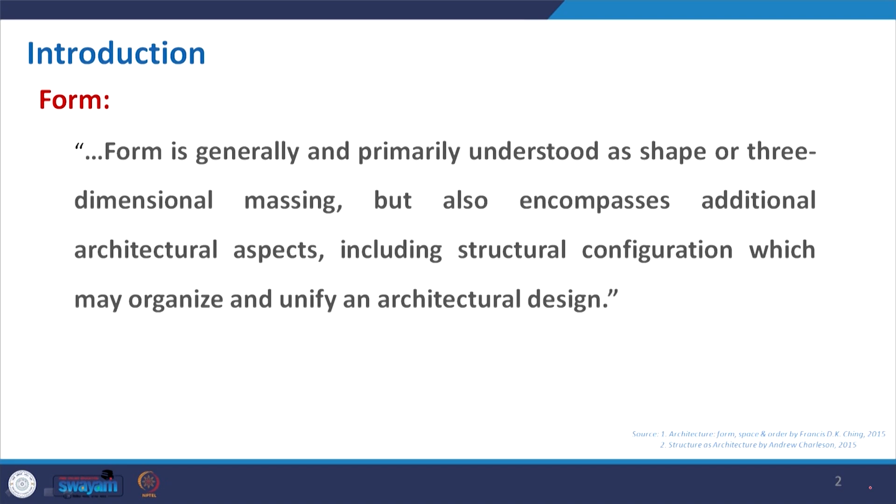So, it is not a very dull three dimensional shape; in order to give it the term architectural form, it also has different aspects like space creation, then different arrangements including structural configuration, and this is obvious after the initial few lectures. Now, we all agree that in order to give the form of architecture, structure is indispensable, means it is very much needed. Without structural stability and structural support, we cannot create the form the way we want, which may organize and unify architectural design.

So, basically form by this definition, if we simplify this, is a three dimensional object. Along with that, it will have some architectural aspect, it should have some space to live in order to maximize your utility, and also this should be supported with some structural configuration, and finally altogether it will create and unify an architectural design. So, with that we move forward to the architectural form.

So, here it says architectural form is an inclusive term that refers primarily to a building's external outline or shape. This is very important. Whatever form we normally talk about, most commonly we refer to the outline of the building. If a building is something like that, we say it is a domical form of architecture. What is inside the space we essentially do not talk about.

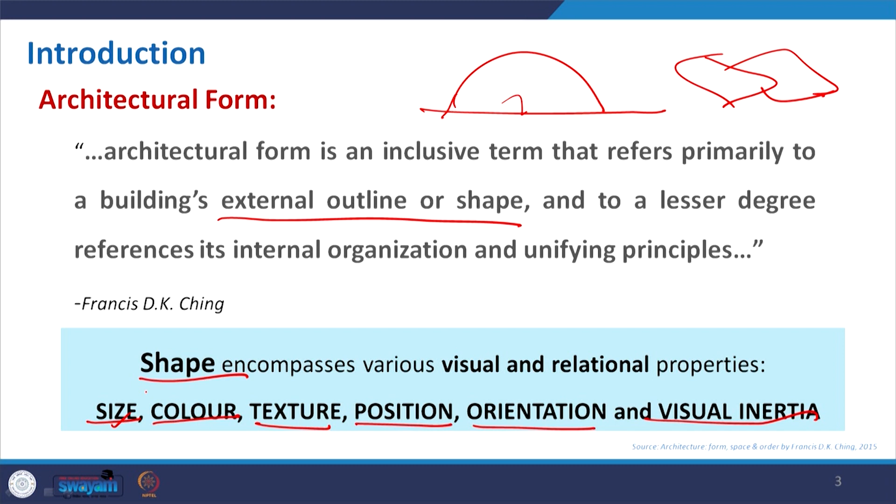So, whenever we see any image, or those who have some interest in photography, they also capture a frame. In the frame we have a background and a foreground, with different color contrast created. Sometimes the architectural form is very simple, rectilinear, but the color used through the material or paint can create something different. Texture, as we have discussed, may sometimes be rough and sometimes very smooth, like glass. So, this is important, the position of that.

Now, based on the position, how you place your forms one after another, how you make a composition, will give you a different sense. Orientation is again very important, not only for aesthetic purposes, but also sometimes to tackle the lateral load. If you recall the wind load, we have seen that when we place this rectilinear form and this is the prevailing wind direction, it creates thrust. If I just rotate it a bit, we can minimize that. And visual inertia is very important; it gives a visual sense of stability.

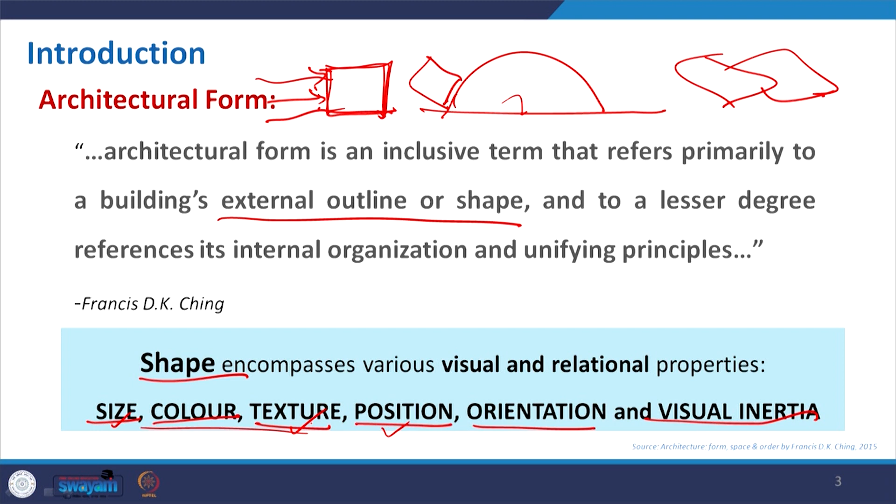We have seen some buildings in our previous lectures where the building follows stability, visual stability is there, and sometimes it is not, which refers to visual instability. So, these are the properties of a form that distinguish one architecture from another. Now, come to the structural form.

Form is shape. Now, how do we distinguish between architectural form and structural form? That is the question. Here, structural form is the primary or most visually dominant structural system of a building. This statement does not give a very comprehensive answer. So, what exactly does it mean? So far we discussed that shape is a three-dimensional thing. To make it architectural form, it should have space and other things to call it architecture, and the outline of that architectural design, whether rectilinear or curved, is your architectural form. Structure is basically the backbone of that, the dominant structural system.

Now, here we should be careful. When we say the dominant structure, what exactly do we mean? By looking at the building, you get to know that this structural system is of this kind. But in most cases, a building may have more than one structural system, one to give structural stability, another to give some other facilities. So, which system is visually dominant, which form will we take? A building may have an arch form in some part, and elsewhere just a beam-column structure. So, which form should we take?

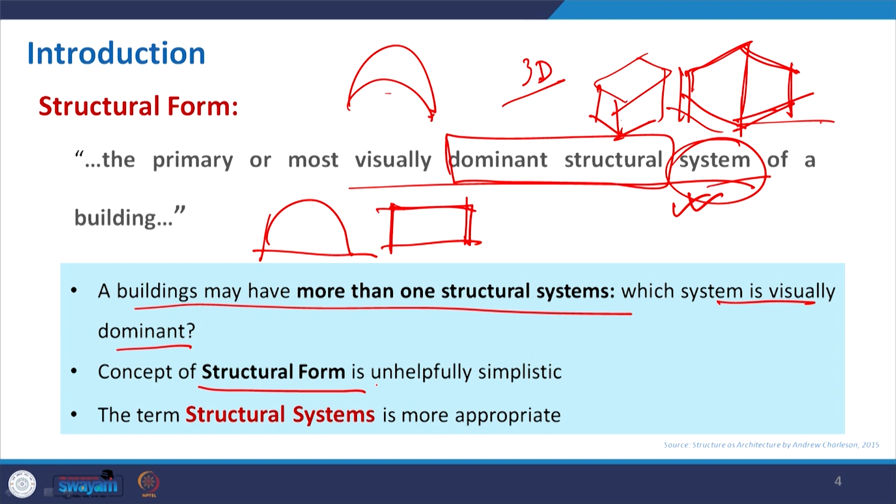So, the concept of structural form is unhelpfully simplistic. When you say structural form, it is rather to say this is the structural system. Structural systems have categories, and we can classify them in many ways. One way is by the overall three-dimensional shape. But structural systems can also be defined by other parameters, like their nature, whether it is a compressive structure or a tensile structure, or in other terms, supporting structure or supported structure. We will not discuss those in this lecture, but in future lectures; here we will primarily focus on the structural form based system.

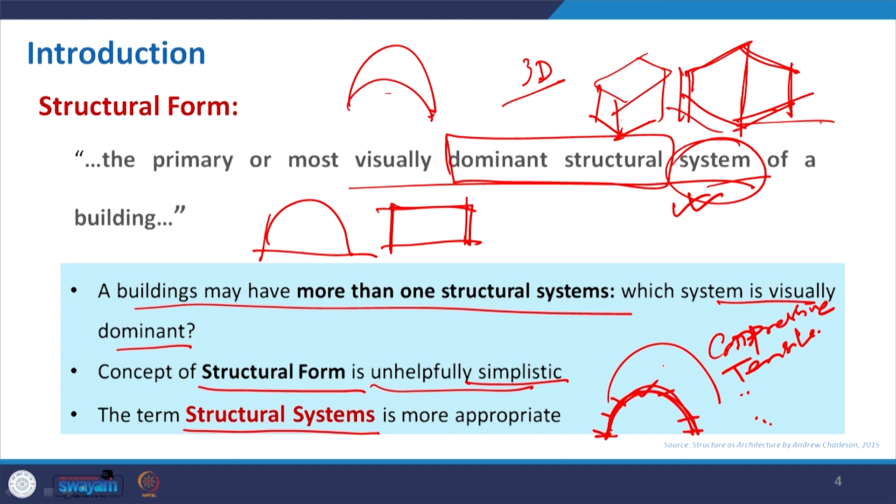I will make it clear with an example. Say you see a building made of concrete or steel members, and the form being created is simply an arch. So, this is basically the form, but whether this system is tensile or compressive, we will touch upon those issues one by one in future lectures. So, let us move on to the concept. Again, this is a very important and very interesting slide.

Here the structure can be defined with 4 S: strength, stiffness, stability and synergy. So, what is strength? Strength is the property by which you can prevent breaking. If I have a beam with good strength, maybe made of good quality concrete, it will resist more load.

Take this pen example. It is made of some material having some kind of strength, but not as compared to concrete. So if I put pressure on it, it may break. With a pen it may take some time, but if you do it with a chalk, because of its brittle property, it will break even earlier. So strength is a very important property of a structure. Depending on the load, we have to be choosy about selecting material having proper strength, which will help prevent breaking.

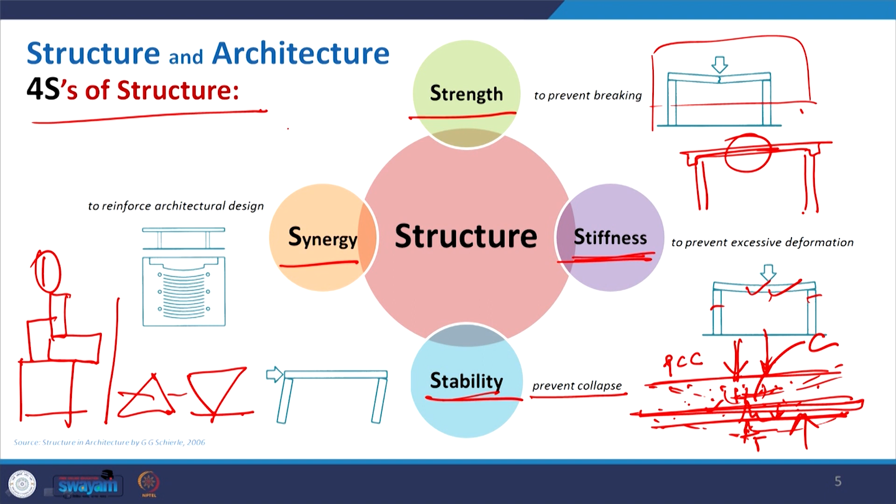So if the arrangement is something like this, we make a composition — this is option number 1, and I make option number 2 here. When we arrange these cuboids one after another, this is option 1, this is option 2. Now my question to you: looking at these two, considering the same material, which structure is considered more stable?

I am sure all of you agree that one is much more stable than the other, because of the mass and other factors, and that is why the points where it gets connected are very crucial. Now, we have discussed the activity during earthquake, so there will be some lateral movement in both directions, horizontal, left and right, and vertical, upward and downward. So in that case those joints are very critical, because here you represent it in the real case - this is slab, this is beam, there will be some column, and those joints should be cast adequately with proper care taken.

So that during that movement this structure will act as a monolithic structure. What is monolithic structure? Made of similar single material. Sometimes a cave, we consider the rock cut cave, is a monolithic structure. So that all will have the motion together, so that this building will be stable.

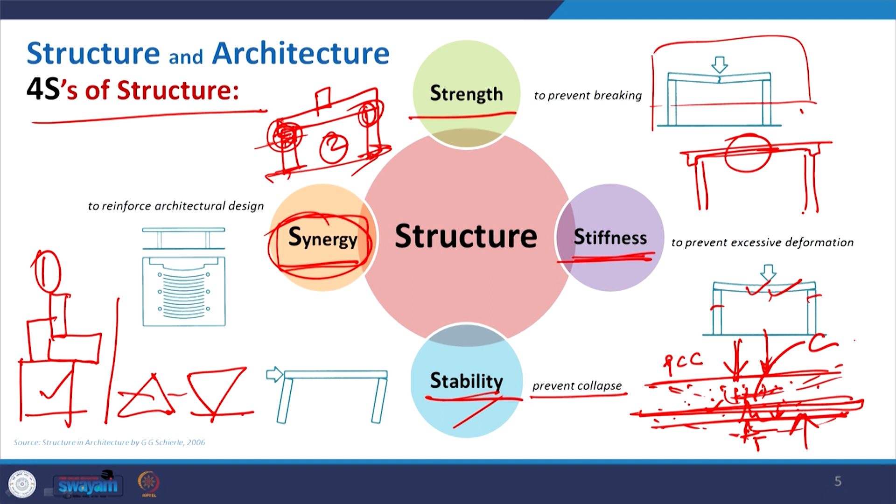But before we proceed further, let us understand the term shell. I can give you the example of an egg. What exactly is it? The white outer shell has enough strength, and in some experiments it has been shown that it may take up to even more than 20 to 22 kgs of load. This is very thin, so brittle, and those who have eggs in their daily menu know that when you break it for an omelette or something, it is very thin, but it is able to carry a certain load.

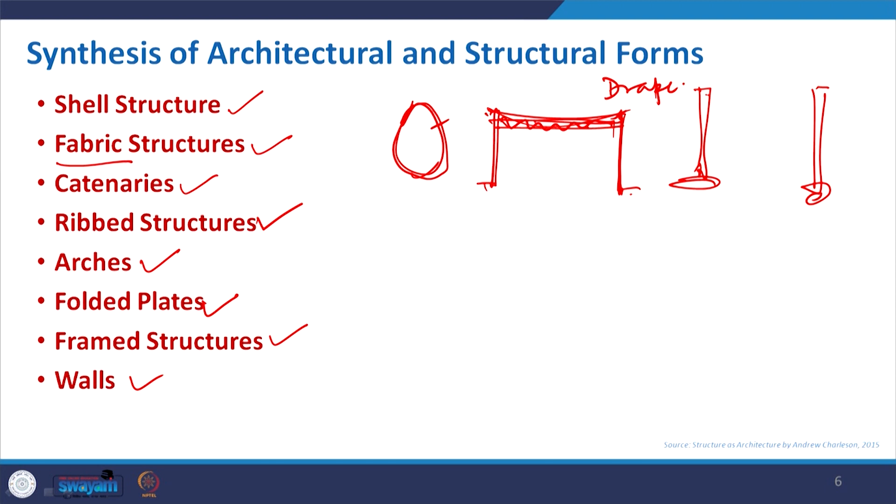If you see the railway track, over that all those electric posts and transmission cables and other things, we have some portal kind of structure. This is a catenary structure. Another example is the queue in a station or meeting place - in order to manage the queue, we have certain posts with elastic material fixed in some direction. This is also called catenary.

We will see this application in our architecture. Then ribbed is something like the skeleton. If you remember, we started with the lecture taking an example from nature, like the human body - we have muscles, outer finish, clothing, and depending on color and other things, but basically we are stable because of the support of the bone, the skeleton. This is true for some structures where it is very predominant. Every building must have some structure or skeleton, but this kind of ribbed structure is very predominant - we will look into that also.

Then arches are very simple - different kinds of arches may form the architecture. Folded plate I explained with some paper - if you have a paper and fold it, it may carry some load, and when you arrange it in order, it can take a huge load. Why it takes load, and how it balances compression and tension, we will discuss in detail when we cover folded plate structure separately in class. Here we will see some examples under this category.

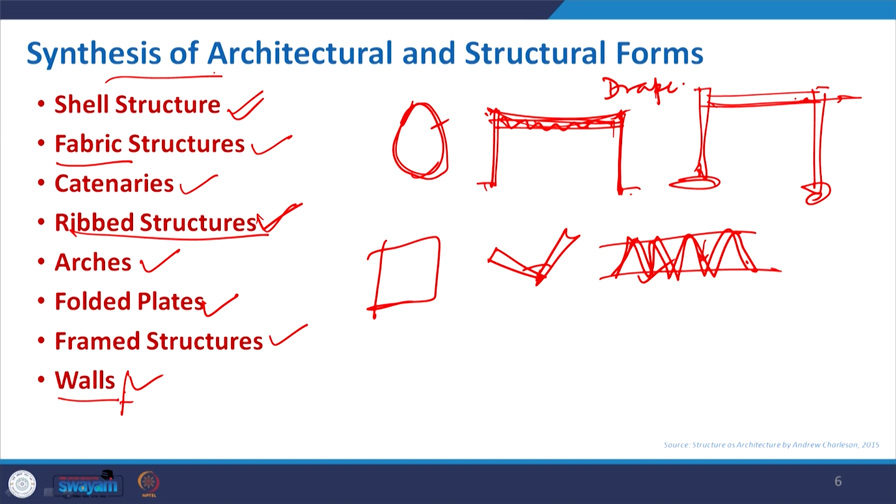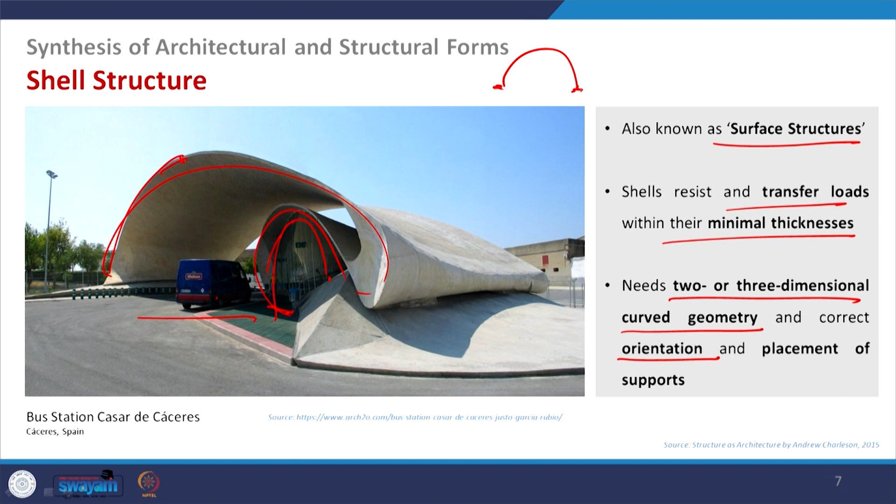Now for that, what is required? A two or three dimensional curved geometry and correct orientation - where to support it, where it should be oriented, how it will counter and transfer the weight, that is very important in this shell structure. What is the advantage if you see this? This area has no column, so you can create some kind of interesting column-free space wherever required. This is one very beautiful example of shell structure.

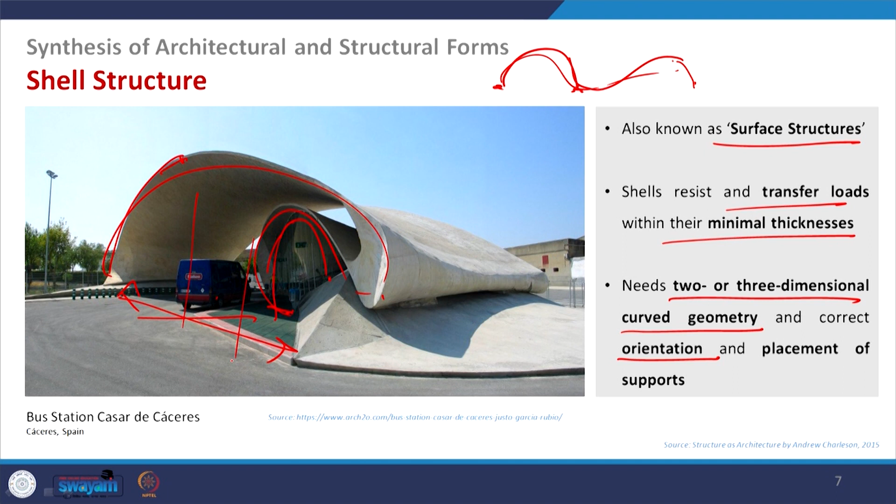Here we take another two examples. This is one auditorium in MIT, and this is the TWA terminal example we gave earlier, which that time we took as a form like a flying bird - but here we are looking at this structural element which is very thin, made of concrete, creating the shell structures. They are being supported somewhere and it can create it. So basically the shell structure...

If you just design it with proper geometry, making the balance, taking care of the moment of inertia, you can create beautiful space with this. The material sometimes may be concrete, sometimes you can think of other materials without compromising strength and stiffness, and definitely the proper orientation and positioning of the support will give the stability to give you the synergy.

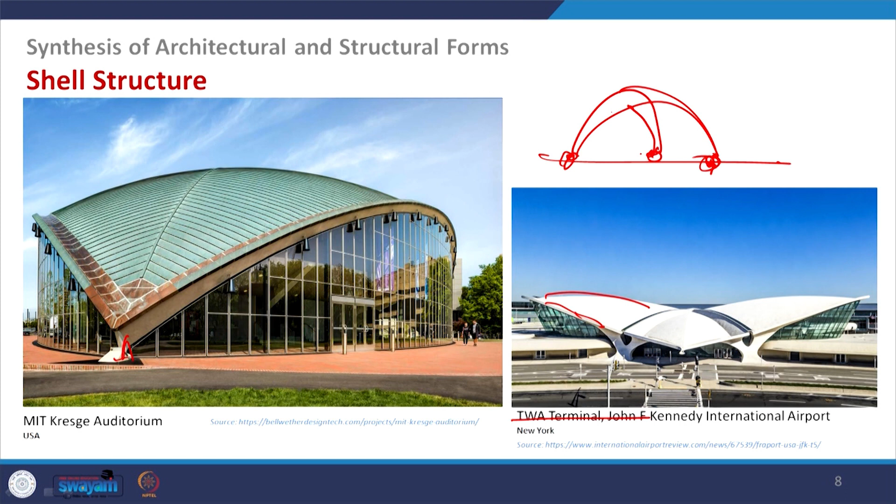and these are very useful to reduce the load of the roof, where it is just a requirement to cover up the area just to protect from the rain and the excessive light or heat. Then we can propose this kind of structure. So, we have seen one example from Munich, that is the stadium, and here it is an ice skating rink, and this is basically a sports center in Germany where it has been used.

So, you can see how it is being placed. There are some supports where this membrane is fixed, and from inside also there are some poles and some cables which will connect it. So, it is the tension fabric that resists the self weight and wind load, because for the wind load there is a problem of upliftment of the structure. If you have a pitched roof, there will be some wind, which will create some pressure here, and that can cause upliftment of structures. So, we have to take care of this.

And now, looking at the form. When we discuss this fabric or membrane structure in detail, there we will see the different kinds of membrane structure. So, here it is basically a conical one, and depending on that we will also discuss some property of the curve, whether it will take the arch form or parabolic or hyperbolic form. So, we will discuss there.

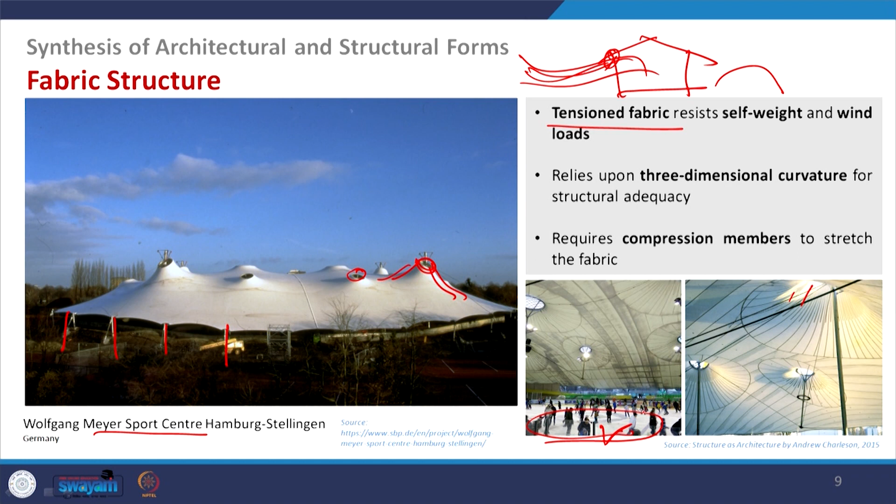It is again in the Arizona State University campus. So, this is a structure, more clear than the previous one, where different posts are being used and cables are used to provide the adequate tension to the fabric. So, it is creating a very interesting shade and shadow and also some space to enjoy, though it is very open in nature, but this is creating a beautiful piece of architecture.

If you see from there, these are all tensioned fabric, supported by some very lesser thickness cable, though they have the strength to carry this thing, and you have some long support pole to tie up to create that tension in an adequate manner.

So, there I can also mention something about cable suspended bridges. There are many examples in the world. That also acts with a certain principle, but here it is called fabric structure because of the fabric being used in this. So, it is again tensile in nature. There are some members which will take care of the compression, but overall it is under the fabric structure.

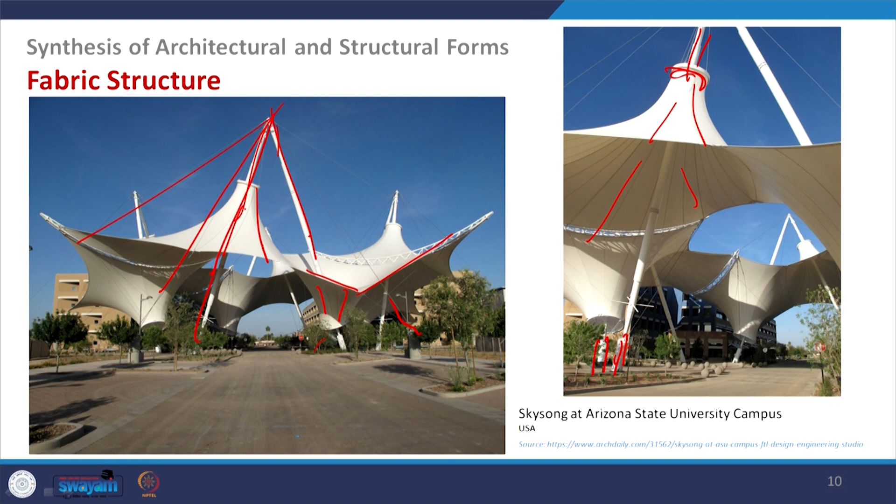Now, move to the catenaries. Already we have discussed that there will be two poles and a member is just resting on that, giving a form of a portal. So, here this is the example of Dulles Airport, Washington DC. Here you can see this is a terminal building, because your terminal building should have some openness and you should not really obstruct it with a regular number of columns.

So, here you can see that this is basically a series of such components placed one after another, and then there are some slabs, the catenaries, which will rest on this to support. So, inclined piers support the catenary slab. This kind of structure is seen in many cases. So, here the synthesis happened with the catenary.

So, overall this gives a sense of a portal, but it will also make this particular space column free. So, whenever we require this column free kind of structure, we may think of that. So, what exactly happened there? Transfer load to the support through tension. Roof self weight should resist the wind load because of this kind of long span.

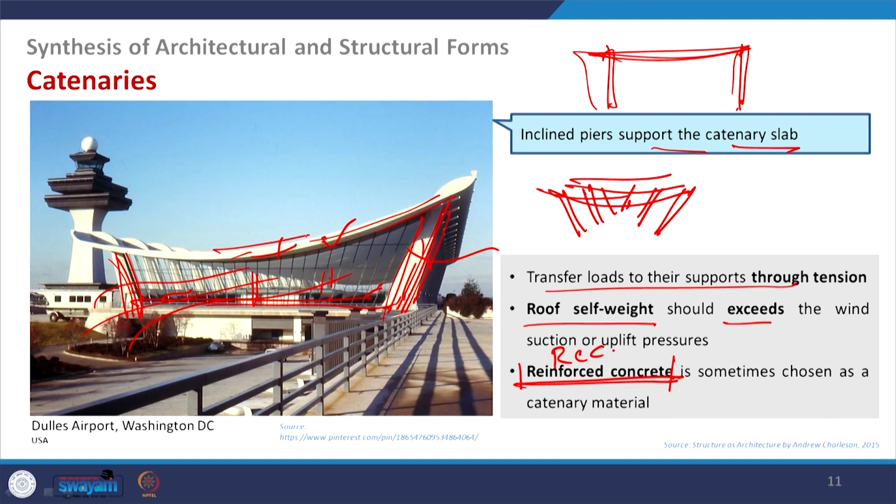There will be, if this is free, a flow of wind and other things. So, this should have adequate self weight so that it will resist against the wind load. Now, reinforced concrete is sometimes chosen as the material because of this property. This is RCC because this will act with the tension. Compression can well be taken by plain concrete, but in order to take care of the tension we need some reinforcement, as RCC does.

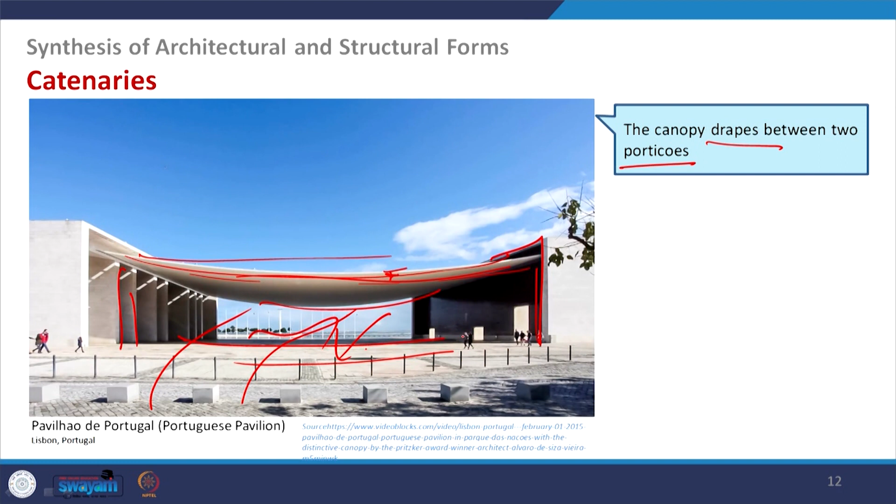So, it is allowed to bend. Sometimes this kind of structure is created to give some openness to that span. Considering the scale, you can consider this human being's height, take a standard height of 5 feet 4 inches. You can see the span is a huge span. It is stable, it is standing there, and this huge span is supported on this portico. So, this is another example of catenaries.

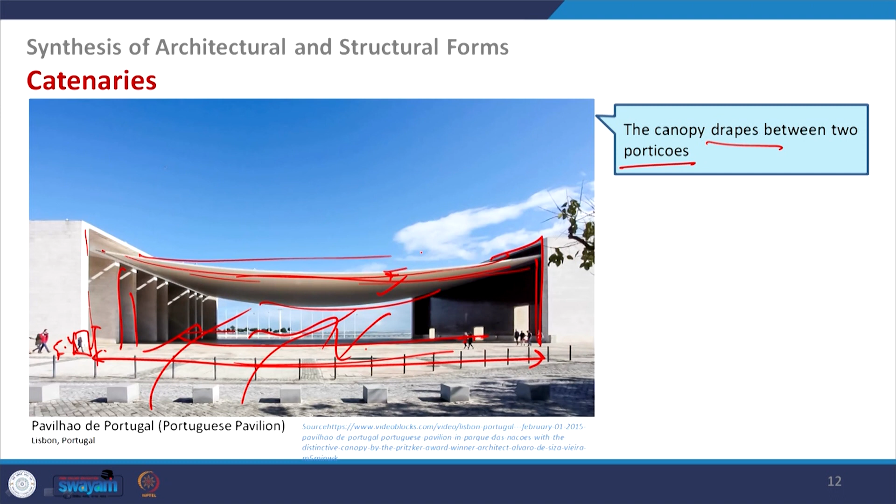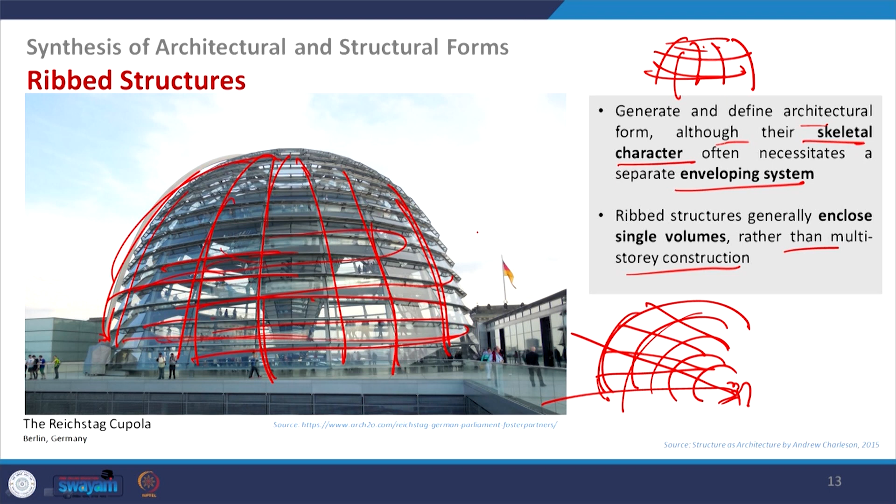Rib structures generally enclose a single volume rather than multi-story construction. Whenever you have a multi-story building, sometimes we compromise it and go for a small kind of structure, not a high rise with the skeleton. But definitely in some high rise buildings we have used the ribbed structural form, put in a grid structure and so on. We will discuss that in the upcoming lectures.

Take another example, this is the National Art Center in Tokyo, Japan, and here is another example where you see that you have some vertical member structures and some wavy structure connecting. So, from inside also, if you see, the openness is maintained, but it gives a ribbed, skeleton kind of appearance from outside. So, it is very predominant in the building. So, I have taken this example under this category.

So, vertical but curved ribs support and define the undulating facade. So, here it is creating some undulating effect through the structural arrangement.

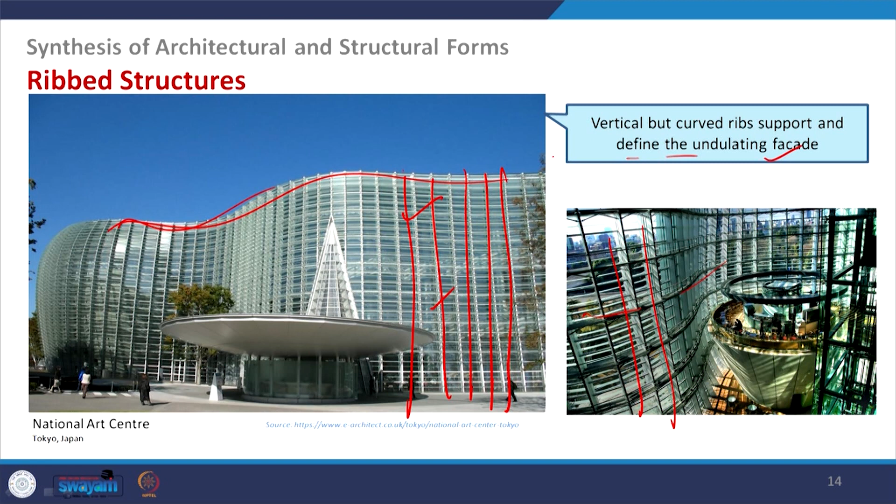So, in Islamic architecture we have seen some pointed arches, and later in Felix Candela's designs we have seen structures that are basically parabolic or hyperbolic paraboloid, and semicircular is very common in many of the domes we have seen in Indian history. So, there we use the semicircular form, even in Gol Gumbaz in South India. So, there also we have seen that domical structure, and it usually meets the ground at an inclination to the horizontal.

So, here it is meeting the ground, but sometimes it is a combination where you have a rectilinear form, and then on top of this arches or something in a domical form. So, the example I have given of Gol Gumbaz is not exactly the arch, that is the dome. So, here we are more emphasizing the arch form. Okay. So, depending on that, how you create the arch as a door or entrance is more predominant in this part.

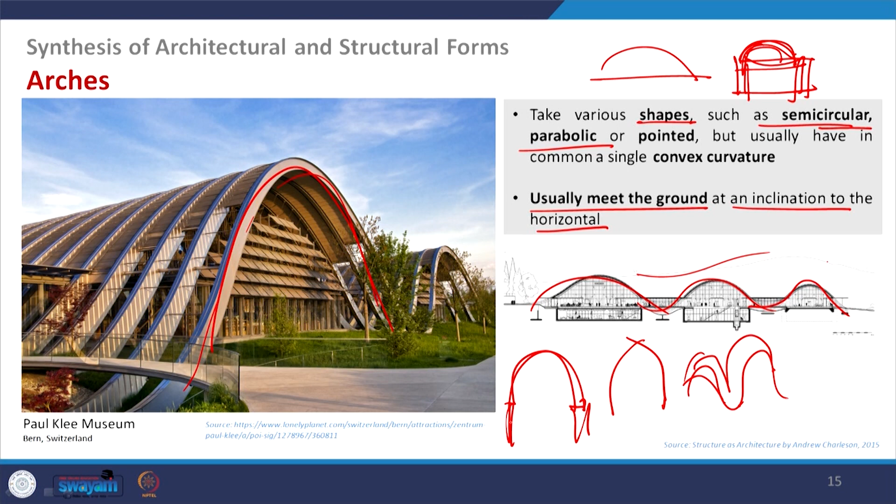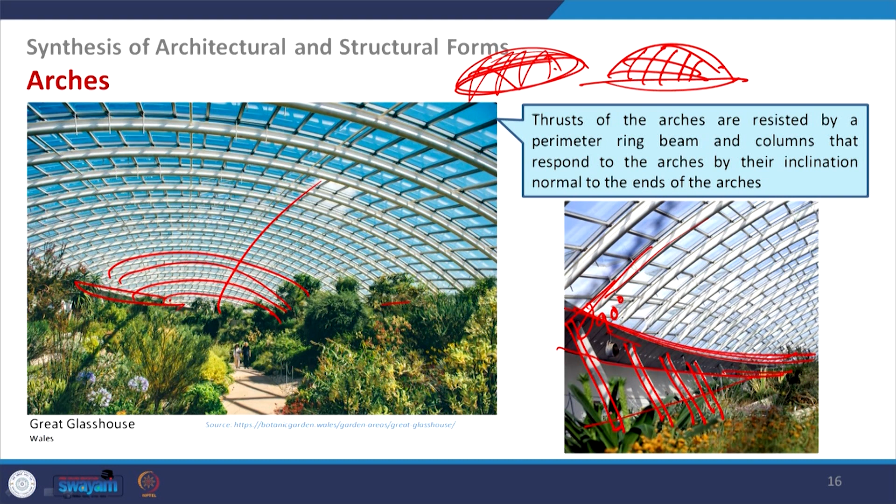And in order to have a smooth transfer of the load on top, they have some inclined vertical supports, columns which are basically normal, making almost 90° to this support, so it transfers the load in that sense. So, this is another example of arches. Mainly the arch is predominant, but it is supported with some other format. As we discussed at the beginning, a building may have multiple kinds of structural systems, but looking at the dominance we put it in some category.

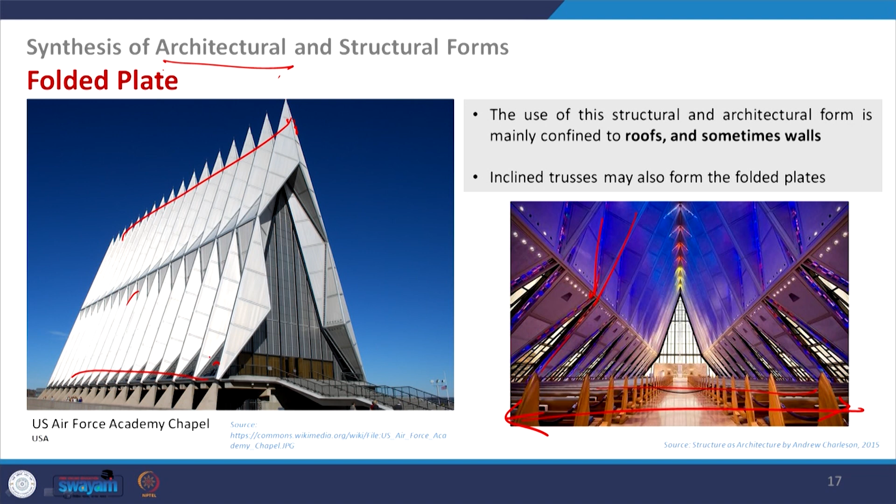So, it is giving the strength. So, the ridge and valley will have different compression and tension; we will talk about that in detail. So, this is something we can see: instead of a plain surface or domical surface that we have seen in many historical buildings, here it is created with the folded plate. Those valleys are supported at the end, and it takes the load, transfers the load to the members, and solves our purpose to create the space the way we want.

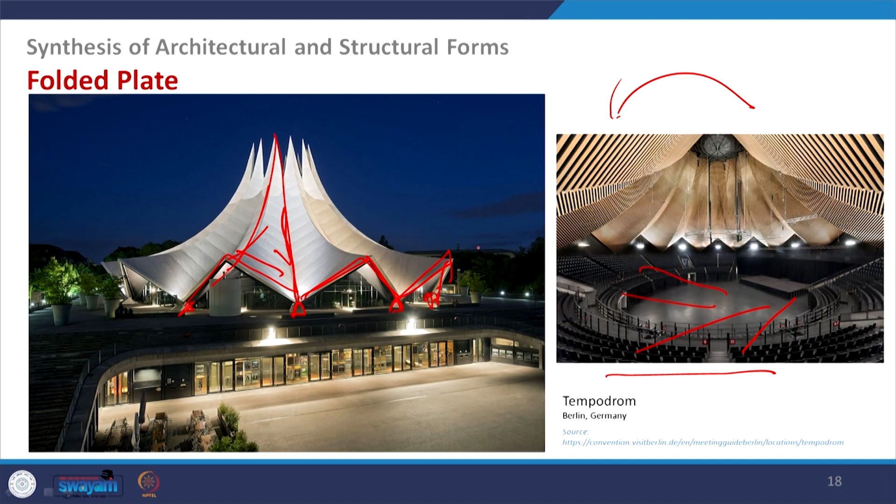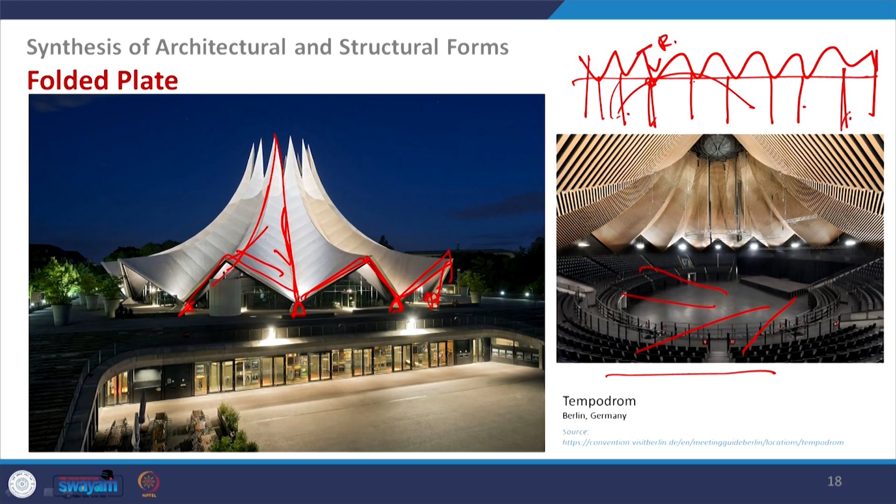And depending on the space, the requirement, the volume, the design will definitely change. So, this can also be used for a warehouse. There we can have this kind of structure, and we support some of the area wherever we have this valley. So, ridge is the top portion and valley is the down portion, as for any mountain, and this is pretty similar to that. Concrete can be used, and some small galleries are made with wood. When we discuss structural materials, we will look back at this to see what kind of material is suitable for different forms.

Normal housing buildings are also of this frame structure, but it has some limitation in terms of height. When we discuss the evolution of high-rise buildings, we will see that when height goes up, along with the gravity load, the self weight acting towards the center of the earth, there is lateral load like wind. The gravity load can be taken care of, but when you go vertical, as we have seen, wind pressure increases with height. So, we have to support it with some advanced technique. We moved from frame structure to tube structure. We can also add structural bracing for extra support. We will not discuss it in detail now; we will come to how to get the desired height of the structure.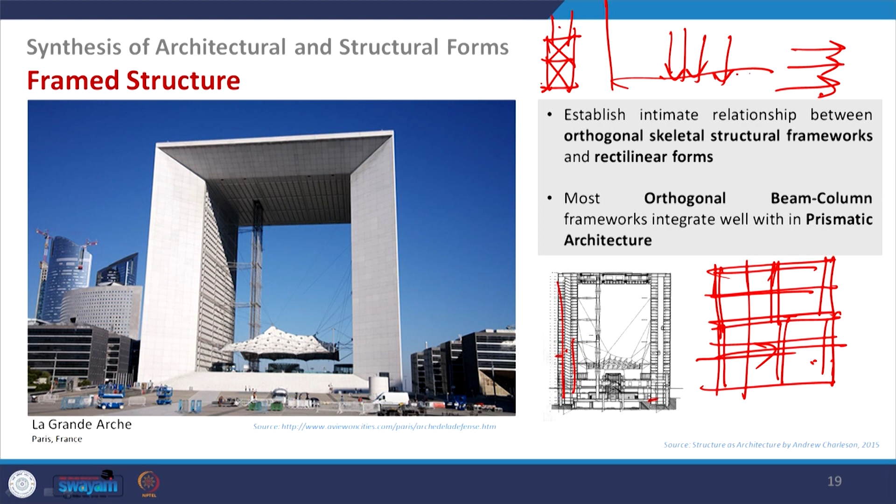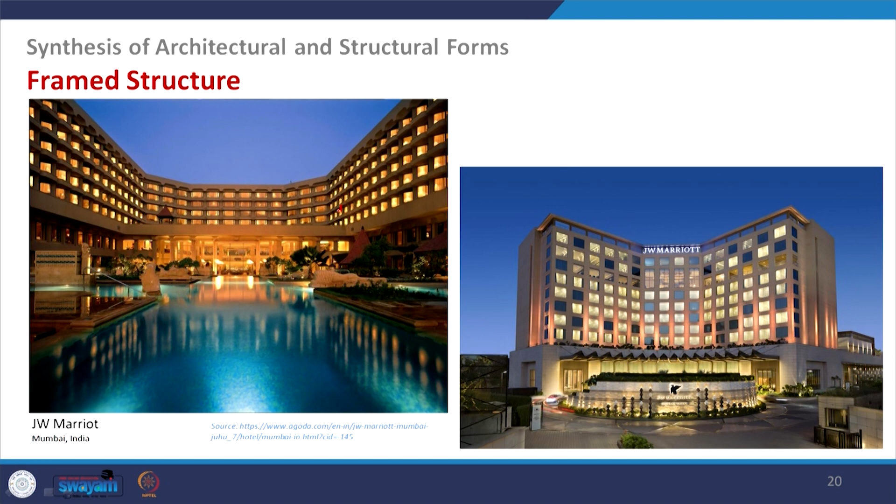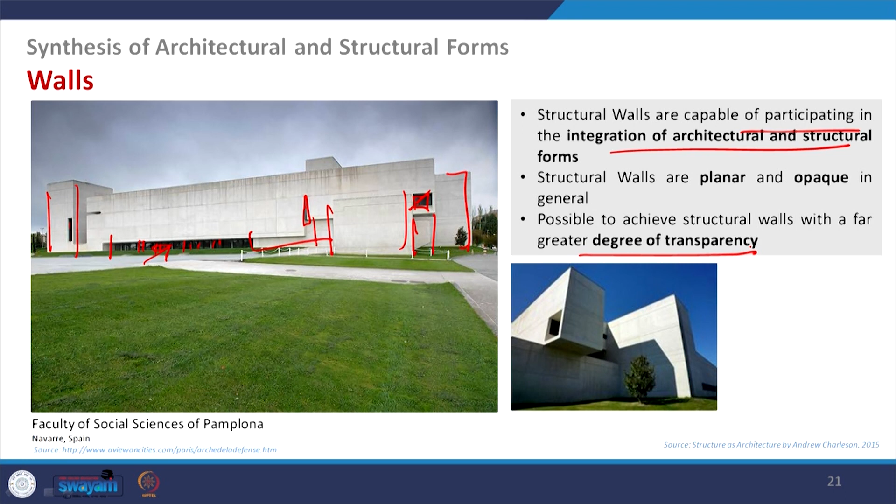Now, this is the last category, that is wall, where structural walls are capable of participating in the integration of architectural and structural form. Basically it is mainly a series of walls. That is very predominant here, though some part has stilted columns, but overall it gives you that particular sense. If you see this side elevation, there is hardly any opening, just a sleek opening here and in this portion. But we will not always have this opaqueness; sometimes we can achieve some degree of transparency with the wall through a proper combination. There are examples of Louis Kahn buildings. We will discuss this during the detailed discussion on walls. So, move to the next example.

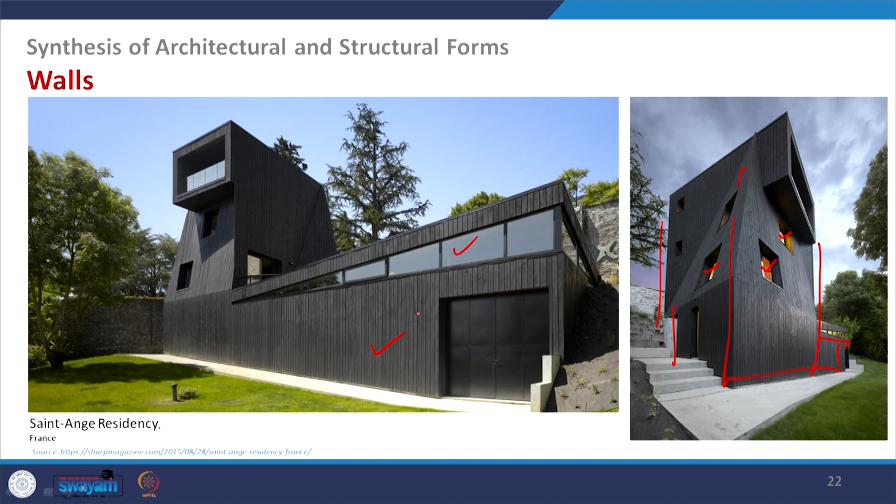Opaque and transparent you all know: opaque is something that you cannot see through, transparent is where you can see through. So here we can see that the use of glass can give a visual connection for the people staying inside to the outside world, but here predominantly the structural form is the wall which is creating this architecture.

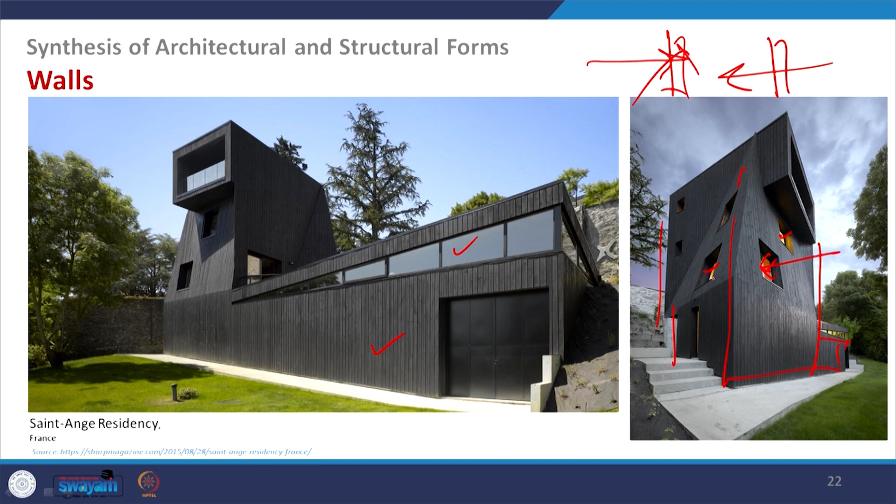So now to summarize, the way we have discussed in this presentation, we know what form is. Your form is shape, so 3D. And then we discussed architectural form. So not only is this the outline of the building, but plus some other architectural aspects.

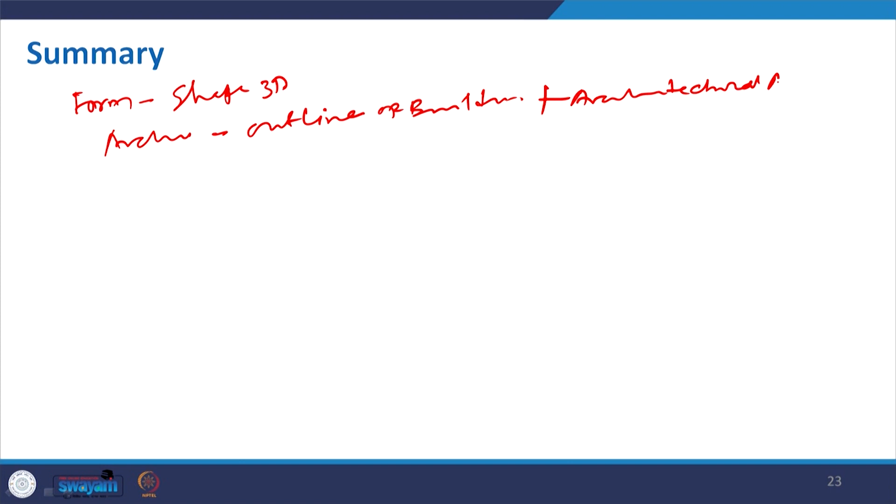Next, we have also learned about structural form. Here we said that the predominant structural system of the building is what we consider the structural form. So from that we came to the conclusion that it should be a structural system rather than a structural form.

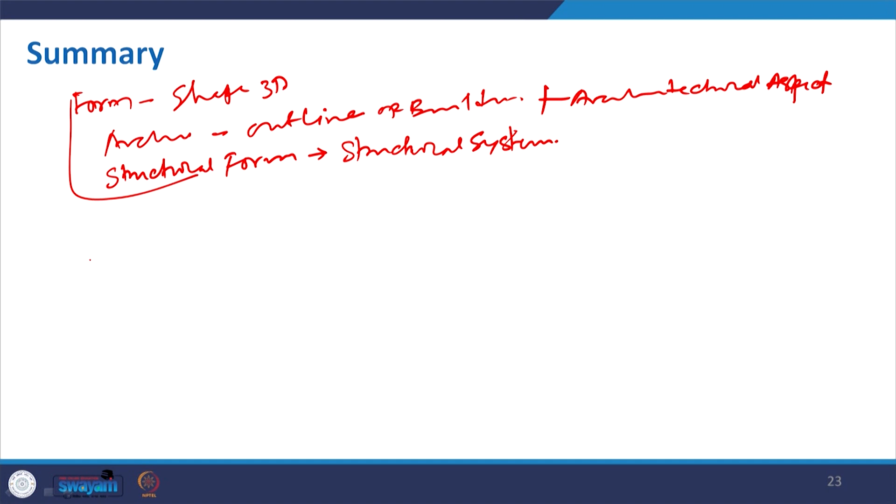And then after that we also discussed the 4 S's of structure, which is very important, not in any particular order. One is your strength, then you have your stiffness, then you have stability, and then the synergy. These 4 components are essential to create it.

And next, the synergy, the synthesis between architectural and structural form depending on the predominant structural system of the building. Based on that we have 8 categories. So what are those 8 categories? If you can recall, we started with the structures, just not in order.

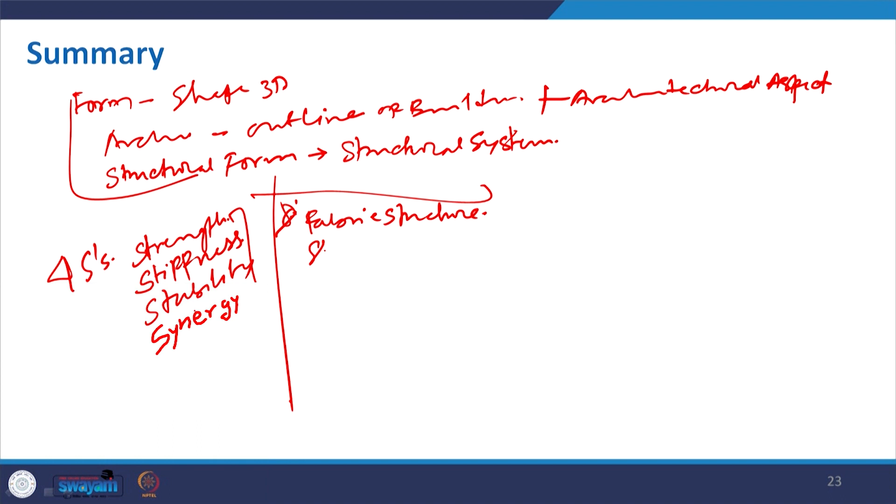Let us start with the fabric structure, then you have the shell structure, that was the first one. Then we also discussed the catenary. Then framed, then ribbed, which is skeleton type, then arches, and then folded plate. And last but not least, we also discussed the walls. With all this we create a particular predominant structural form which is visible in our architectural buildings.

We have seen many examples and there are many more. I advise you all, as I have only given you a few examples, to explore more examples, and in some forum we will also discuss how to define which is the predominant system of that building. I would love to see those questions and discussions. I am looking forward to that.

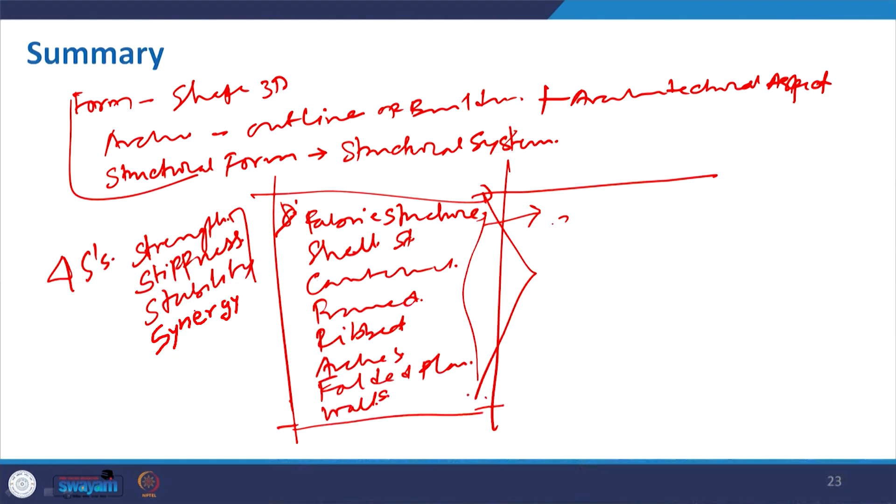But sometimes it is predominant, yet at the beginning of the lecture we said that a building may consist of multiple structural systems. So they may sometimes create something different, not fitting into a category, creating some contrast. We may have a building like this, where it is very tough to put it in a category. Somewhere it is a combination of the frame, or the shell structure, and some part folded structure.

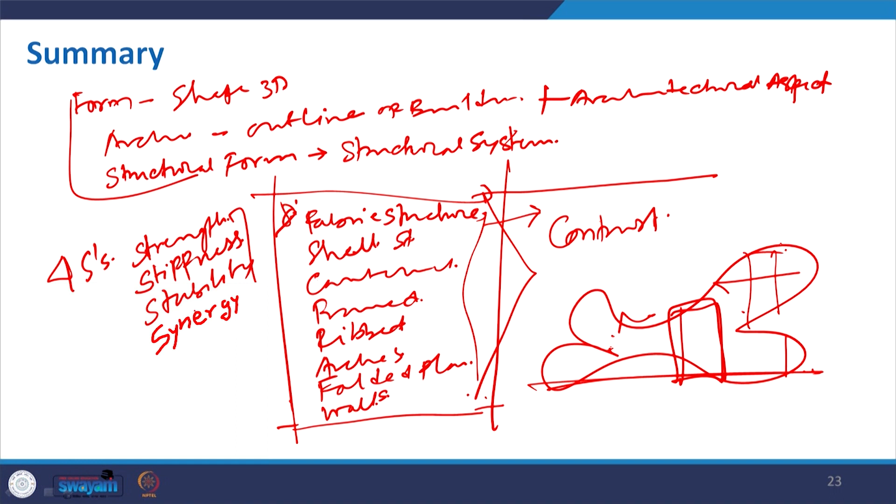So it creates beauty. Overall we appreciate not a particular dominant structure but the overall composition, creating contrast, creating something very beautiful. With that, the upcoming 2 lectures will discuss a single topic: connecting structure and architecture. We will see cases where sometimes structure is predominant, sometimes architecture is predominant, sometimes it follows, sometimes it is unorthodox or not orthogonal. That will be our lectures 6 and 7, connecting structure and architecture.

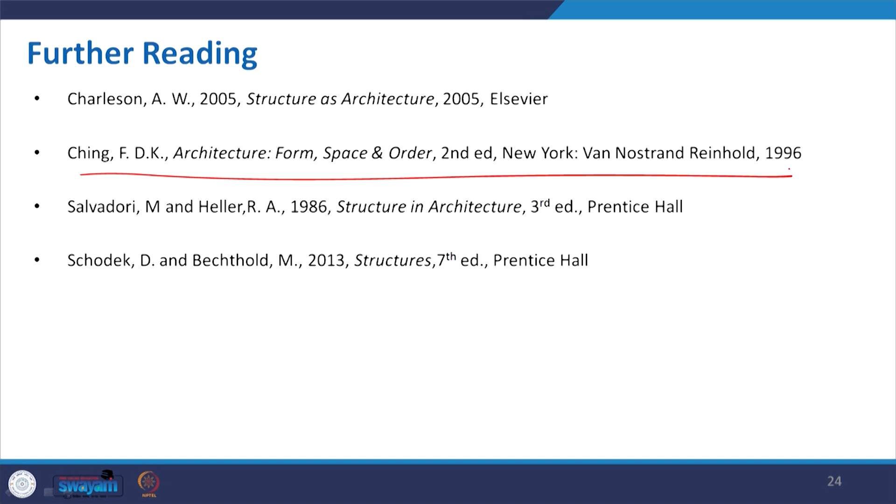And these are the references. I have added one more, a book written by D.K. Ching, Architecture: Form, Space and Order. You can go through it, and I have also given the references for all the image sources. You can go and get more detail.